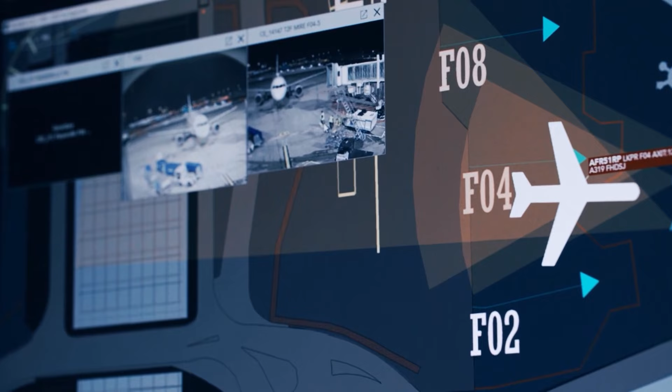They do their utmost to ensure that a scheduled flight actually takes off, despite the countless hazards faced every day. Air transport is at the mercy of many factors: meteorological, geopolitical, geological, technical, IT, and so forth. So it's our job to steer our business through this obstacle course.

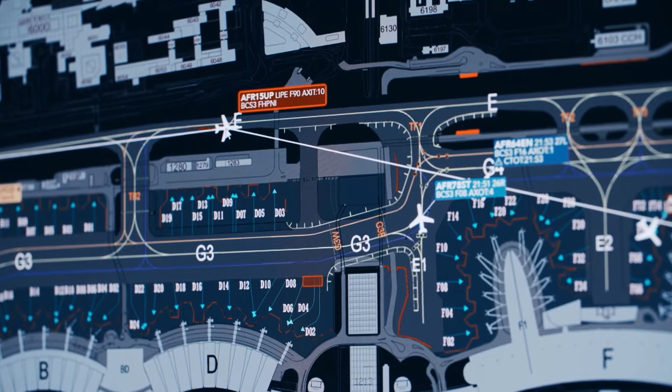To achieve this, the Operations Control Center brings together experts from 17 different professions. More than 150 people are on duty around the clock. Airport liaison coordinators, meteorologists, regulator experts, passenger information specialists. They need to be able to adapt to any situation.

Decisions have to be made on the spot. As you can imagine, depending on unforeseen events such as the weather, things have to be decided quickly. Do we divert a plane? Do we interrupt operations? So it's really about day-to-day situations and being able to validate a decision made in real time. A plane is delayed in New York because of a heavy thunderstorm and is 2 hours late. Obviously, this has an impact on the following flights in the schedule.

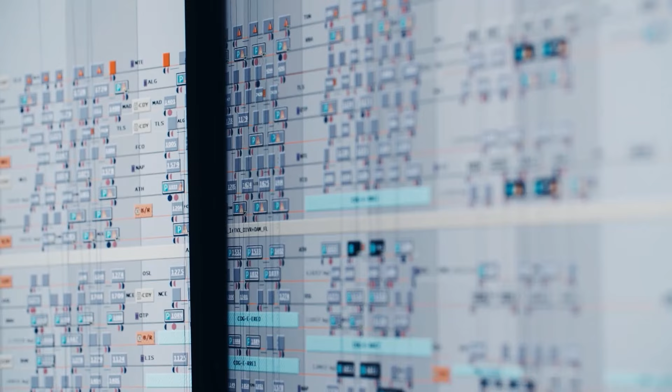Issues pertaining to fleet maintenance and upkeep are obviously at the heart of the control center's decisions. Today, an Airbus A220 bound for Stockholm is causing problems. The aircraft is no longer able to make the trip. The cause? A collision with a bird on its last trip. The Papa November India fire? Is it repaired? No. It won't be ready for the 1462 Stockholm flight.

The aircraft has to be replaced as quickly as possible. The trouble is, the 5 reserve medium-haul aircraft normally used for last-minute emergencies are no longer available, having already been allocated to other flights over the course of the day. I'll ask for it to be on the runway around 8 p.m. if possible to limit the damage.

The final option lies with the control center maintenance specialist. He has to assess activity in the hangar to try to save the situation. Hi, Arnold. We have a problem at the OCC on an A220. I saw that Papa November Bravo is in. Do you think we could hurry it through and have the plane in the next 2 hours?

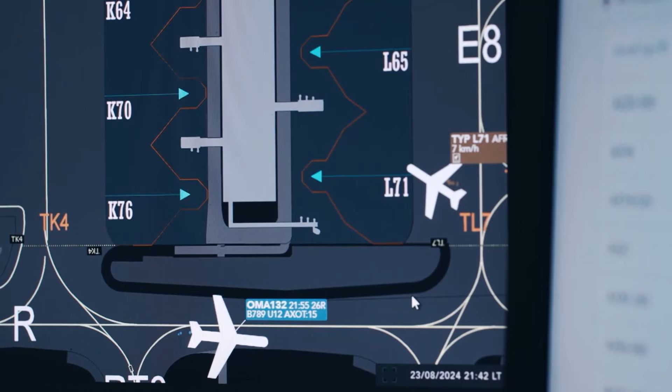Okay. Well, that should do it then.

Maintenance departments adapt their activities and do their utmost to ensure the smooth running of the flight schedule, and thus make any problems invisible to passengers. We are constantly monitoring the state of the fleet, so we can pick the best options to solve any problems that may crop up.

In the Air France hangars, this kind of schedule flexibility is essential. In addition to the usual preventive visits, the teams have to leave room for any unexpected urgent repairs caused by incidents on the ground or in flight, requiring the rapid intervention of technicians, be it a collision with birds or more complex cases.

Back in the H-2 hangar, the A350 Orleans is still receiving attention, and it seems to require a little more work than a simple routine check. The crew and the aircraft's detection systems have reported a probable lightning strike.

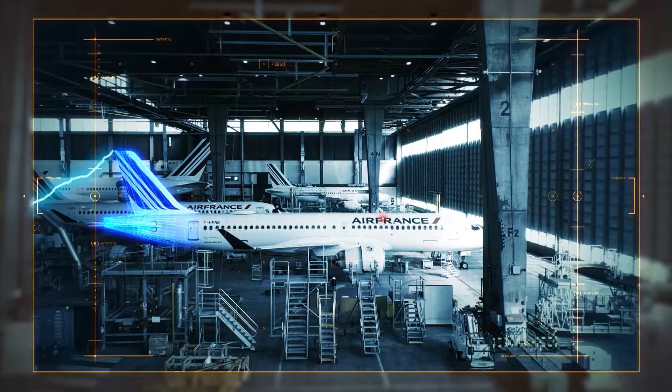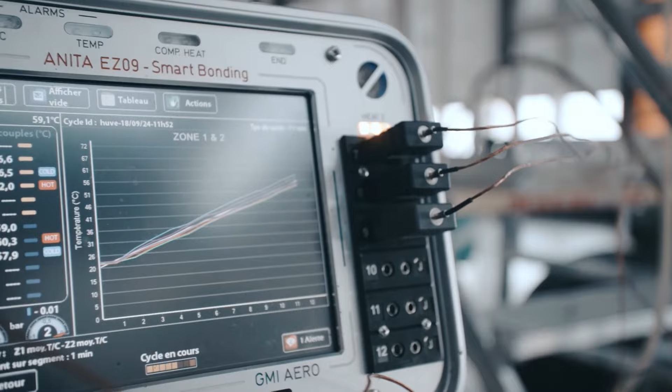Lightning strikes the fuselage just as it would a tree on the ground, except it will be discharged and leave the plane. A problem that can occur, though, is that the impact and the high temperature produce a flaw and an entry point for the lightning on the aircraft. The mechanic's first task, then, is to clearly identify where the lightning struck and what damage was caused.

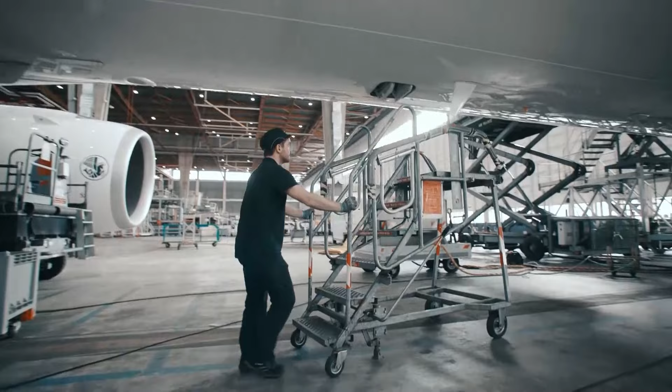When an A350 is struck by lightning, it takes around 100 hours for technicians to inspect the entire aircraft, from nose to tail, examining all the areas that cannot be inspected from the ground. A total of 4 strikes have been identified, 3 at the front on the fuselage itself, and 1 on a fin situated beneath the aircraft.

At first glance, the damage appears minor, but it actually affects a crucial part in the shape of an antenna that ensures communications with the ground. This bundle of electronics is far too sensitive to be kept in its current state and has to be changed immediately. The component is first disconnected from the electronics bay, then removed and replaced.

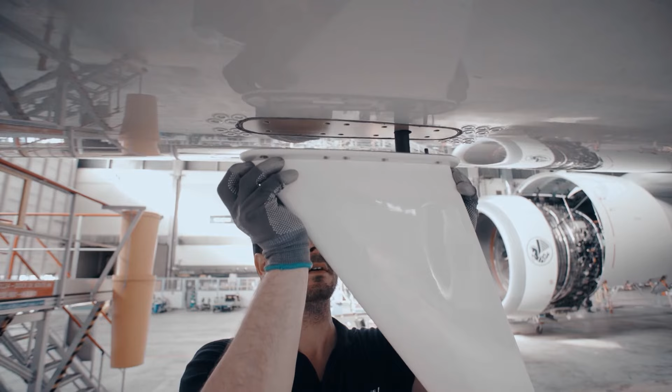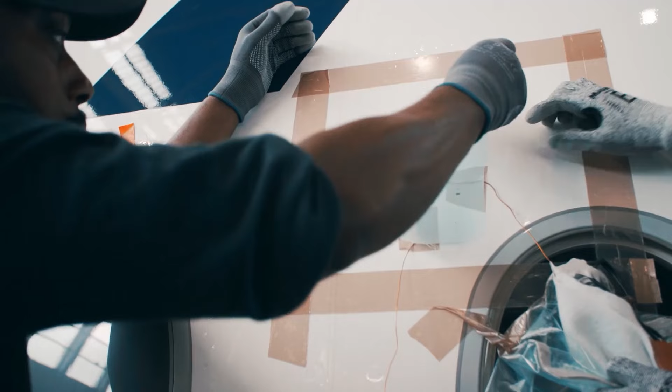While the antenna is being replaced, the other 3 impacts are being dealt with. Straightforward fuselage damage to be repaired before the next flight. Under these strange devices, the areas struck by lightning have been reconstructed and are now being heated by experts of a new kind. Plasturgists have now been brought in as reinforcements to join the usual hangar crew of mechanics. Their area of expertise is the new generation of composites used to manufacture aircraft, which require special attention.

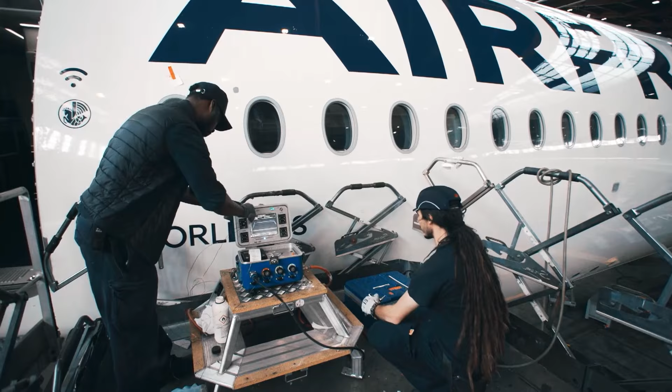We work with carbon fiber aircraft, which are much lighter and stronger than what we had before. The downside is that it's a little more difficult and costly to repair. As a general rule, a repair on a small lightning strike will take anything from 5 hours to 2 or 3 days. It all depends on the depth and width of the impact.

The lightning damage has now been treated on site. After less than 48 hours, the Airbus A350 Orleans will be able to leave on schedule. But that's not always the case. Some repairs require much more extensive work involving operations that are impossible to carry out here at the hangars. In those cases, certain parts of the aircraft need to be dismantled.

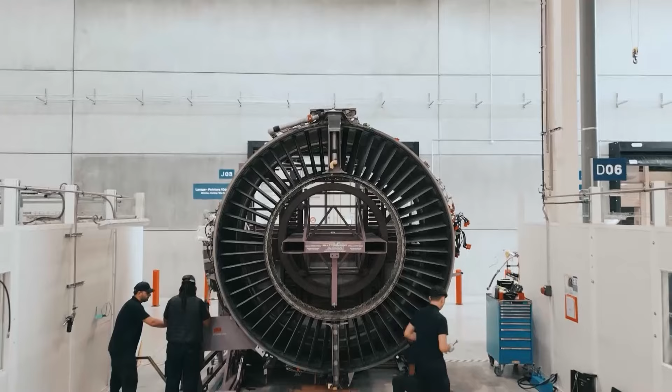To carry out the most complex repairs, Air France has built a large-scale workshop just a few hundred meters from the hangars, the Helios building. Here, away from the hustle and bustle, 200 people are hard at work repairing damage to cabins, wings, or engine housings. These experts can handle traditional metallic components, no matter how imposing, as well as the modern composite materials now used in every nook and cranny of latest generation aircraft.

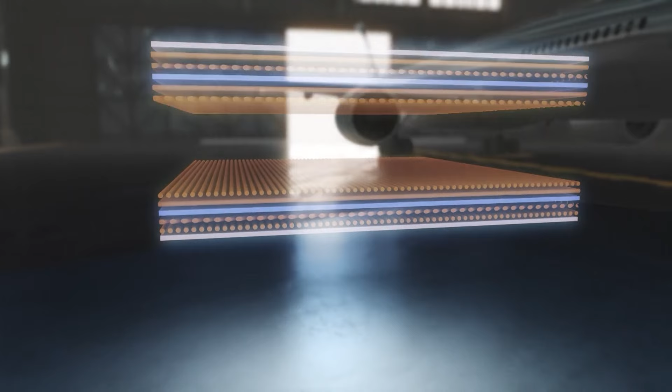A composite is a combination of two substances with different properties, resulting in a material with a performance superior to that of the individual components. Composites, then, are sandwiches of several types of material and, more importantly, several layers. A matrix acts as a support around which can be applied high-strength materials such as glass or carbon fiber using honeycomb cells, which are as light as they are strong. It produces a formulation that is lighter, more rigid, and can easily take on complex shapes.

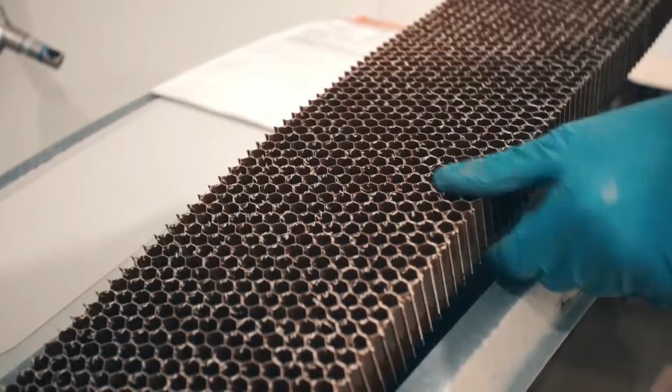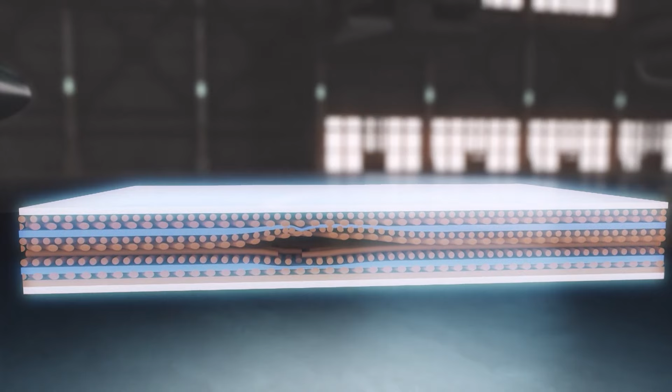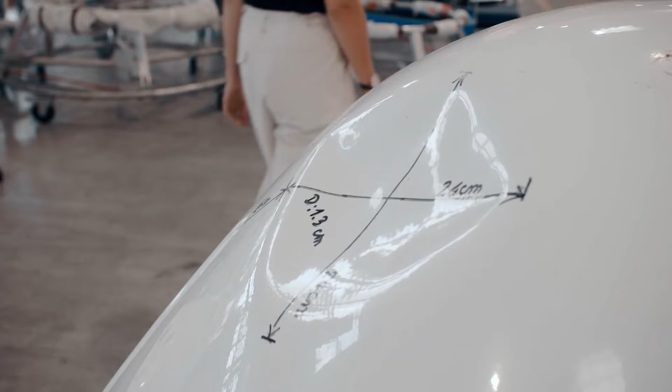It all sounds perfect, except there is a slight drawback when it comes to repairs. And that's the challenge facing the specialists in this workshop. Sometimes, beneath what looks like a minor impact or deformation, the entire structure has actually been affected. In such cases, to carry out repairs, the whole area has to be dug out and rebuilt, layer by layer. Among the elements most often impacted are what are known as radomes, which is actually the nose cone of the aircraft, the section most vulnerable to any impact, however slight. For the specialists in the Helios workshop, repairing this section is a well-drilled activity.

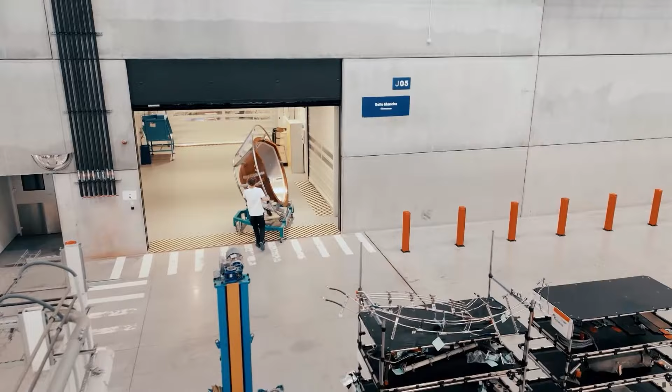The radome can first be placed in what is actually a mold, which helps maintain the part's curvature and preserves its aerodynamic profile. First, we remove the damaged part. Then we take the radome into the clean room to prepare the repair plies and rebuild the area that has been removed. Once the impacted part has been removed, it must be carefully rebuilt to ensure the curves are identical to the original. After a few hours' work, the repair moves on to a key stage, which is curing. This restores cohesion to all the layers of the composite structure.

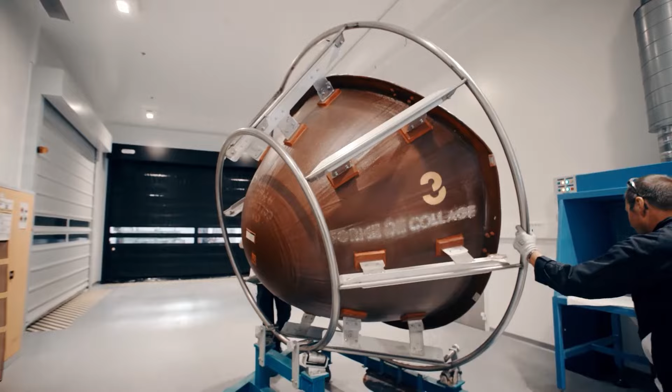The technicians take the part to one of the workshop's major pieces of equipment, the autoclave, which is a high-pressure oven.

All good for you, Thibault? Perfect. Can I pack up?

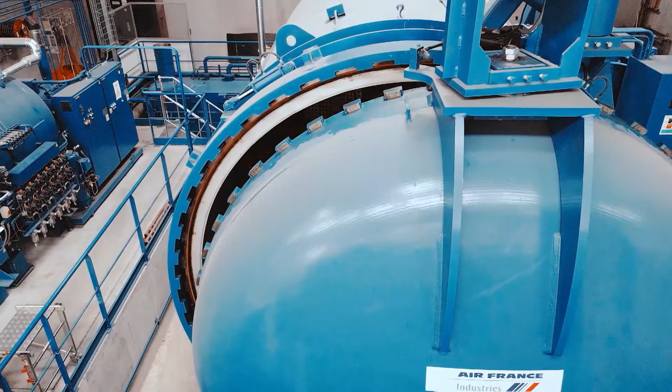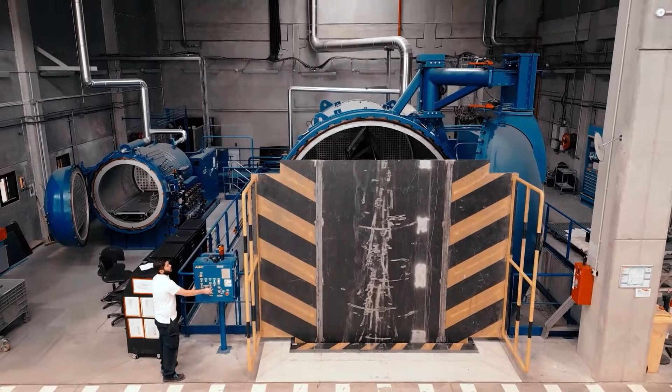Let's go. The autoclave allows high pressure to be built up at high temperatures, making sure the pressure is evenly distributed over the whole part. After 8 hours of rigorously controlled curing, the part emerges as good as new. The repaired areas are now incorporated into the structure, with the composite layers perfectly bonded to each other. After stoving, we check that the repair has been properly heated and the plies properly compacted. And then we're done. The repair is validated. And at that point, the part can be sent for inspection and painting. It can then leave our workshop and be used as required to support the fleet.

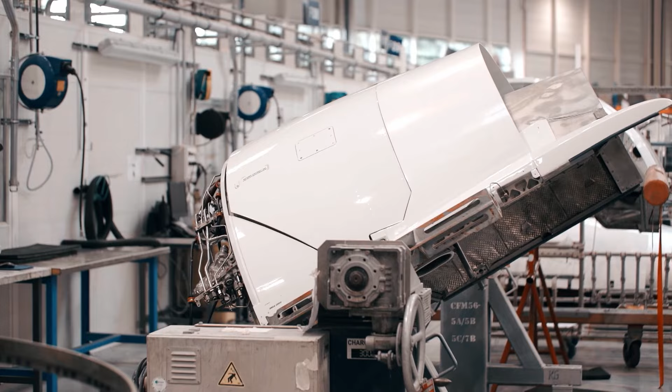In the event of damage, the hangar mechanics will be able to retrieve this freshly repaired radome from the spare parts warehouse, while dropping off the damaged part to be dispatched for repair. At Helios, at any given time, over 500 different components are in the workshop for repair, a process undertaken with calmness and expertise. These repair crews are essential to the day-to-day maintenance of aircraft, even more so when aircraft needs a more thorough checkup. Aircraft are then sent to the other side of Paris to hangar HN3 at Orly, a building specializing in operations that fall under the major servicing banner.

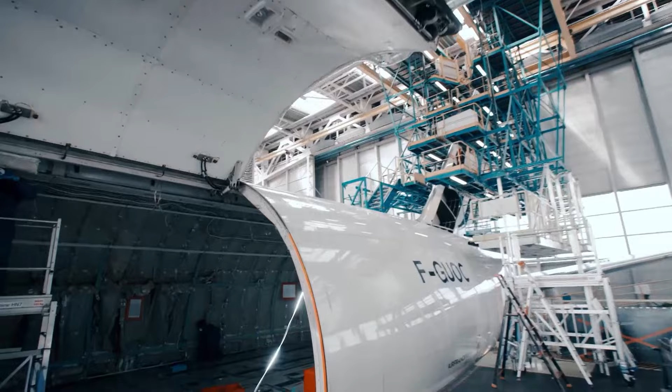In addition to the regular inspections, which mobilize the aircraft for no more than a few days, every aircraft also has to undergo a series of more extensive and thorough checks. This is when an aircraft is brought into a hangar for several weeks so it can be thoroughly stripped down. We remove the side panels, floors, and cargo compartments. This gives us access to all the elements not visible during normal operations of the aircraft and allows us to check for corrosion on the fuselage structure and other elements, as well as cracks and elements that may be in need of repair. These major stripping down visits are key milestones in the life of an aircraft.

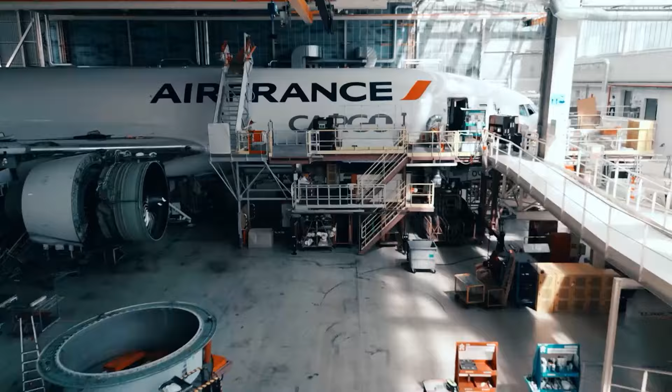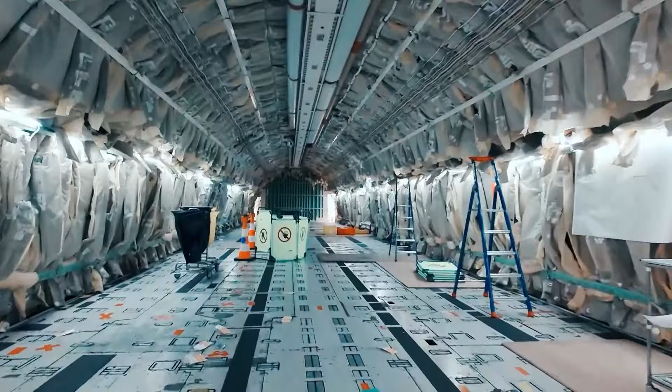16 years after entering service, the Boeing 777F is undergoing its fourth major service. That's one every 4 years for an aircraft with a very specific role. This is one of the company's 2 cargo aircraft, a Boeing 777 specially adapted for transporting goods. A cargo aircraft has no passenger seats and is dedicated solely to transporting goods. Each plane can carry 100 tons of cargo. On cargo planes, the interior of the windowless cabin is transformed into a huge hold, suitable for loading pallets.

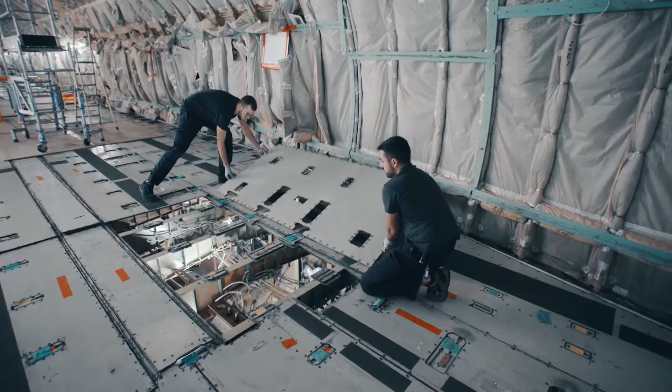One of the major stages in the overhaul is thus a detailed inspection of the aircraft's loading deck, and in particular the attachment points on the huge reinforcement rails. These fasteners are very important. If the cargo wasn't secured properly because a fastener was loose, it would jeopardize the safety of the aircraft. See this?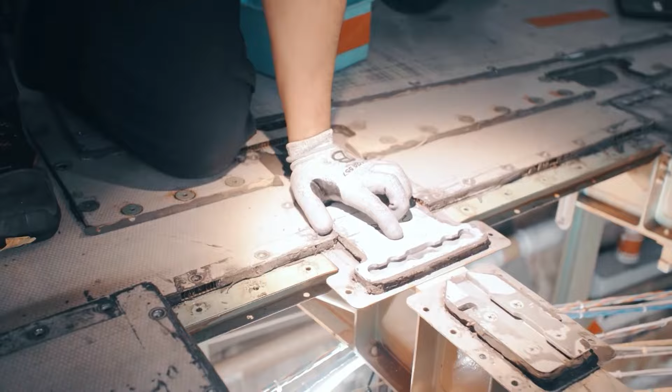It's deep. Corrosion. Sector by sector, meter by meter, the teams check the hundreds of attachment points and report any sign of a defect, corrosion, weaknesses, and cracks that could compromise load safety. First fitting, a tooth is missing here. Small impact on the rail. We'll write it down. I'll make a note of it.

Once their inspection is done, the repair technicians can step in. This painstaking work is just one aspect of a major service. While the cabin is being inspected, beneath the 777's huge left wing, a team prepares to examine a particularly sensitive area, the fuel tanks.

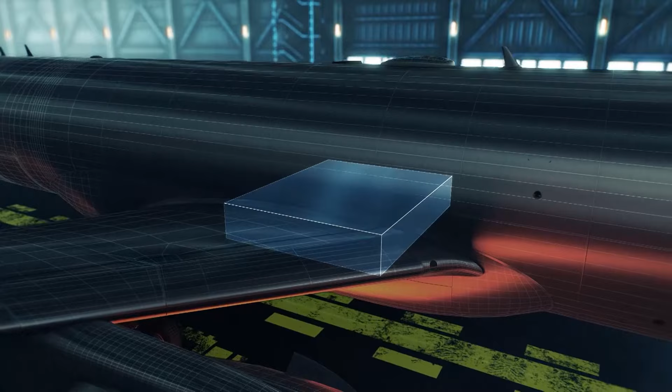On the 777, as on many modern aircraft, fuel is stored partly beneath the cabin in the central tank, but mainly inside the giant wings. A total capacity of 180,000 liters is spread over the entire wingspan of the aircraft. This volume is compartmentalized to prevent any large-scale shifts of fuel that could destabilize the aircraft. It is a complex and highly sensitive area that needs to be 100% safe.

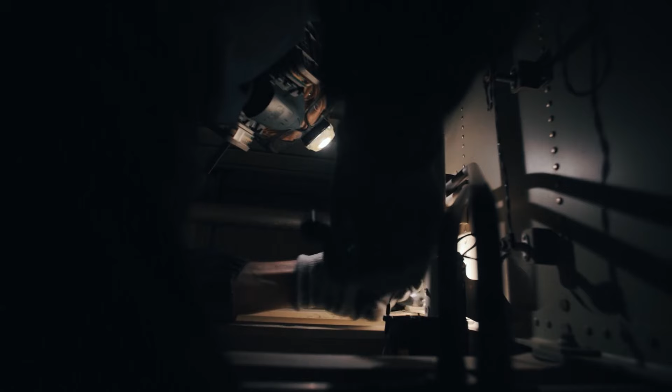Wearing a special suit that eliminates the risk of even the slightest spark, the inspection technician slides into one of the openings. He checks for wear and tear, corrosion, and ensures the high-tech equipment built into the tanks is in good working order. It isn't just an empty container. Inside we have detectors to indicate the fuel level. We have a series of pipes to allow fuel to be transferred from one tank to another, so that the left engine can be supplied from the right wing and the right engine from the left.

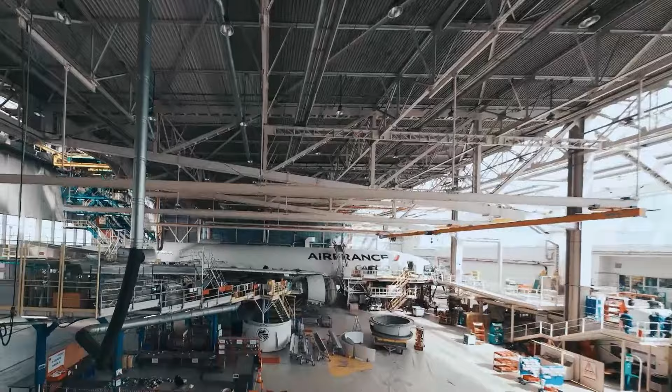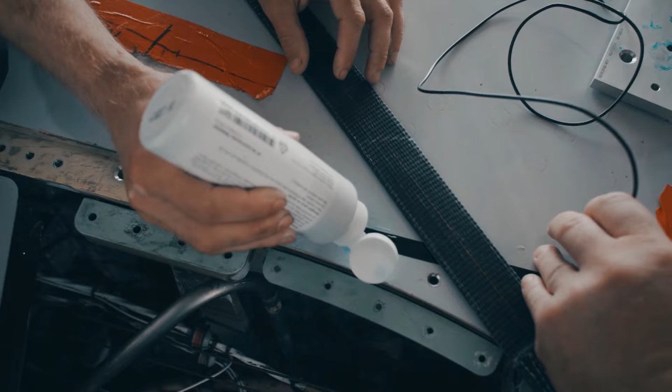Moving through the compartments, one by one, the team looks for the slightest anomaly. It will take them a full day to examine just one of the 2 wings. During these major services, every nook and cranny of the aircraft is scrutinized. Across on the other side of the aircraft, perched on the right, specialized technicians are engaged in a particularly meticulous assignment. Again, with extreme precision, they are closely examining the aircraft's structure, right down to the thickness of the materials. Their objective is to detect any signs of structural fatigue. Micro cracks and fissures can appear over time and need to be identified as soon as possible.

The aircraft is subjected to a great deal of stress, whether taxiing on the ground or in flight, and as a result, can often suffer deformations. The fuselage is subjected to pressurization and depressurization cycles, in addition to temperature variations ranging from 20 degrees on the ground to minus 56 degrees in flight. So all these conditions can generate stress in the structure and lead to fissures or microcracks at corners, around rivets, or at the seams. Let's look for cracks.

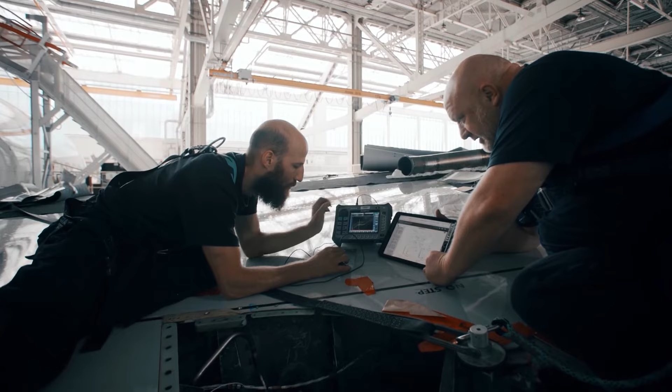It's important to detect every micro crack as early as possible because what we can't control is whether it will develop into something larger and ultimately lead to an unwanted flaw. Like a crack in a windshield, it will just keep growing until the structure ruptures. Now I'm starting to see the defect.

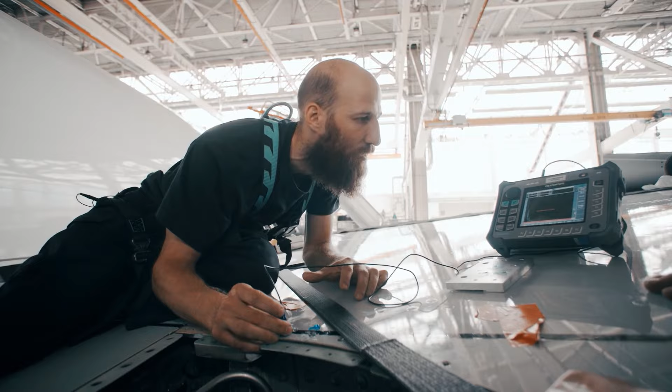The specialists in these structural tests scour the most critical areas of the fuselage and wing with a fine-tooth comb, centimeter by centimeter. By sending an electric current through the material, they can detect the slightest defect or irregularity and potentially the beginnings of a crack less than a millimeter in size. Now we've got the flaw. The crack is there. We were well adjusted. Perfect. Again, if a defect is found, it will be up to the repair teams to intervene as quickly as possible.

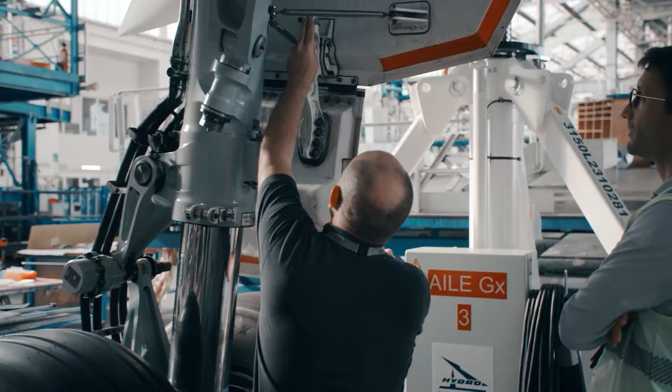These major inspections are painstaking, complex tasks that take several weeks, a period during which nothing is left to chance. The organization never changes. It's important because it means we don't have to come back to the same task 10 times to make sure we've got it right. In all, to go around a wide-body aircraft like the 777 cargo plane will take 10,000 man-hours, just for the inspection. Then another 8,000 hours for repairs.

Repairs on the aircraft itself, beneath the wing, often require the delivery of replacement parts. But some parts require their very own overhaul, a refit from A to Z in specialized workshops. The powerful engines are without question the key component of any airliner. The centerpiece that can lift hundreds of passengers off the ground and propel them safely through the clouds. Back at Charles de Gaulle Airport, the Helios building is where Air France's extensive engine overhaul and repair program begins.

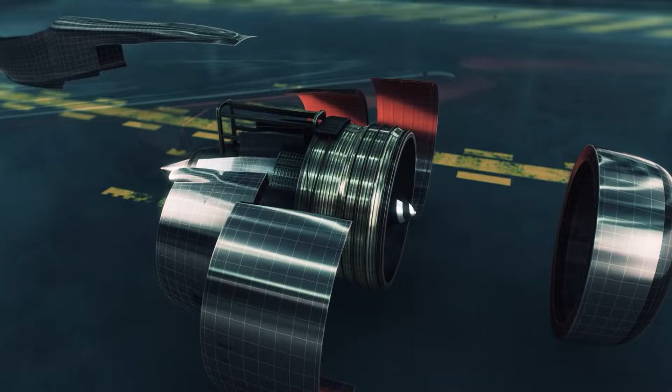First, the entire housing is removed. This includes all the parts covering the engine, and in the case of the very largest, like those of the Boeing 777, the gigantic front cowling that protects the fins. This 2-ton piece of metal needs to be carefully maintained. Guided by the Helios experts, the casing is carefully moved, positioned horizontally, and then inspected in detail.

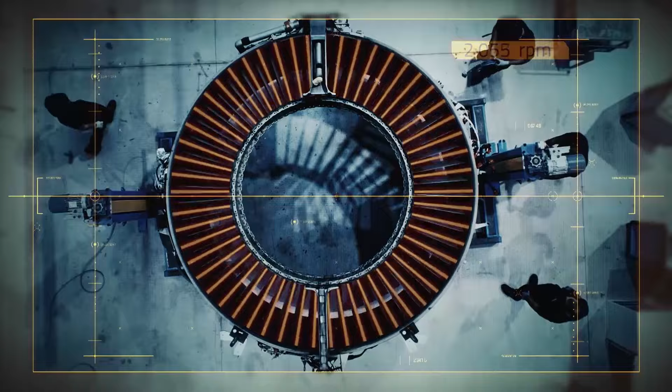Here in this chamber, the jet engine's blades are made to rotate at full speed, over 2,000 revolutions per minute. The technicians not only check the housing for corrosion, they also closely inspect the condition of the inner lining. When the engine is started up, the blades brush against the inner face of the housing, leaving only a tiny gap for the tiniest possible layer of air. The surface of the coating needs to be flawless and perfectly smooth.

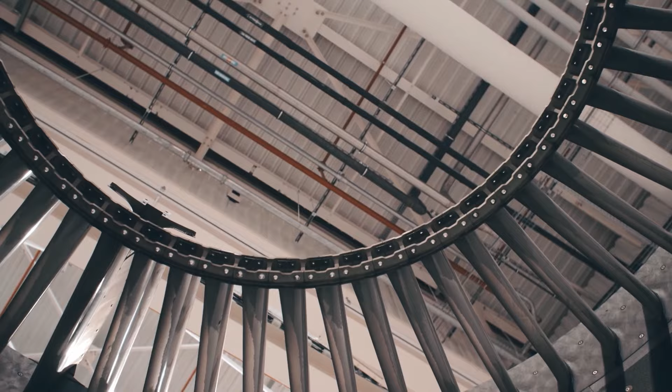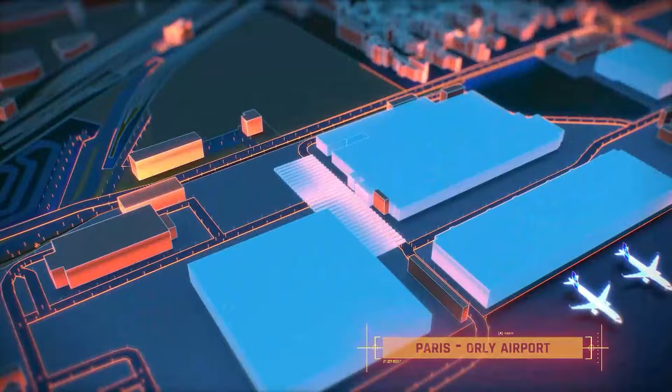As with the wings and fuselage, this is again very precise structural work, essential for the safety of the entire aircraft. With the engine housing removed, it is now time to dive into the aircraft's inner workings. Back to Orly, the engines are settling in for a lengthy stay of some 2 to 3 months in a complex where the entire overhaul chain is housed under one roof.

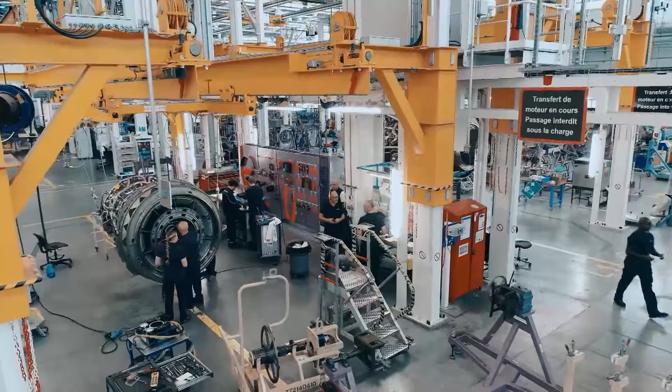From all the Air France hangars, as well as those belonging to other airlines, some 250 engines a year are sent here to be overhauled. Inside this first 10,000 square meter building, dozens of workstations are dedicated to a particular type of engine. Here, experts specializing in a specific model are able to examine it from every angle, whatever the reason for it being there. Are we good on your side with the seal?

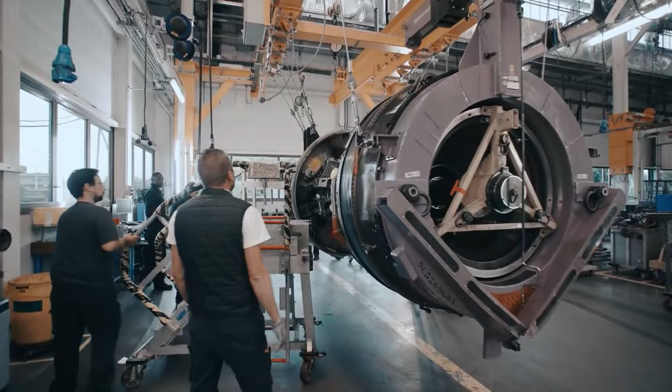Engines end up in our workshops for 2 main reasons. The first is preventative maintenance. That's a bit like having the engine or bodywork overhauled in your car. So after a given number of hours in the air, you need to dismantle the engine to inspect certain parts. Then there's curative maintenance, triggered either by poor performance or maybe after a bird strike. Then we occasionally have to deal with breakdowns, cases where we need to investigate the engine and identify the parts that no longer work.

Whether it's a one-off breakdown or a standard overhaul, the first step is, of course, a detailed inspection. A thorough examination of the mechanics using a device called a borescope. This miniature wired camera penetrates the deepest part of the engine, like a surgeon's endoscope camera. The operator examines all the workings of the mechanics, having access to a detailed view of each part and identifies any potential defect. It's a first-hand glimpse into these mechanical monsters.

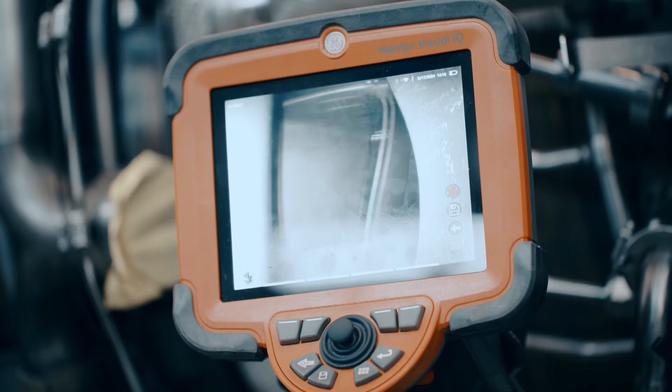The engine is the aircraft's most complex component. It not only provides the thrust that keeps the plane in the air, it also acts as a small power plant, generating the onboard electricity. It is partly responsible for generating the airflow in the cabin, as well as driving the hydraulic power for the flight controls.

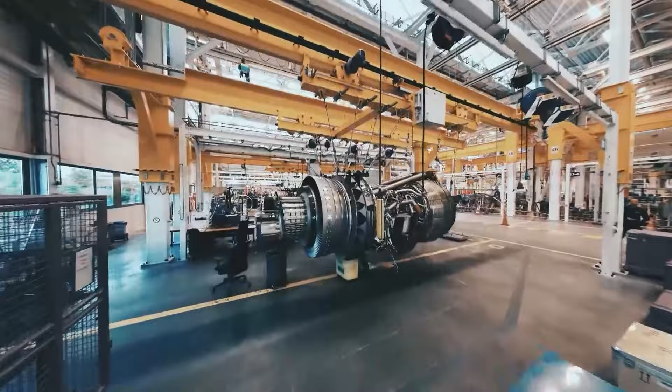Once the inspections have been completed, the serious business can begin, and the engine is placed on a disassembly bench. Suspended above the ground, attached to a sturdy overhead crane, first the large modules that make up the motor need to be prized apart. It's a delicate operation that calls for extreme care. Everyone in position? Yeah. The low-pressure turbine with its 2.8-meter shaft is removed. Should I pull slowly? Yes.

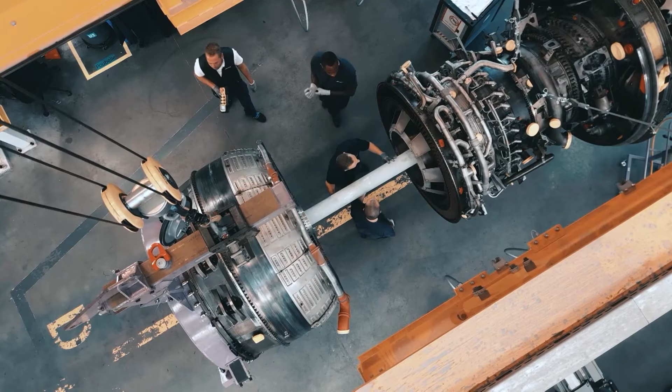All right, it's coming. We remove the turbine, which includes the transmission shaft that runs through the entire motor. This is the shaft that drives the fan blades, which are the fins you see when you climb aboard an aircraft. It's a huge operation in terms of cost, because if we damage the shaft, the part is worth something like €1 million.

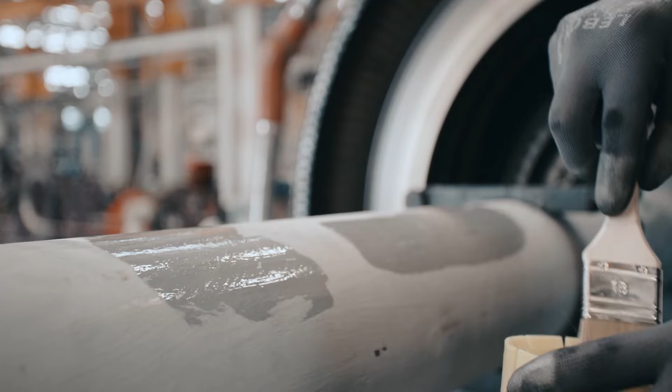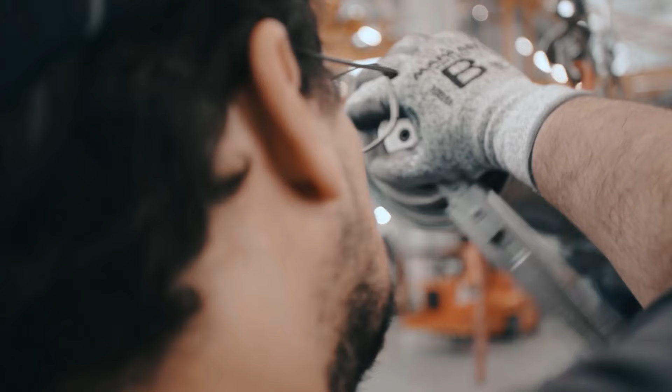On top of that, we have what's called breakage damage, meaning we're probably going to have to inspect other parts and dismantle other modules because we've damaged the shaft. So the overall dismantling costs run into several million more euros. A little more weight, please. There, that's better. The technicians are very experienced and need to pass theoretical and practical exams before tackling these jobs.

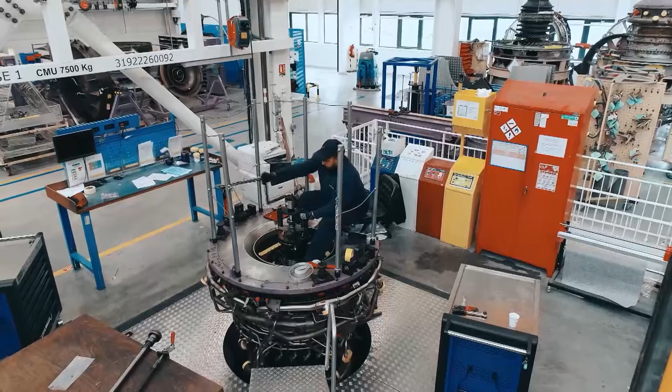Once the various modules have been separated, the actual revision work can begin. The technicians dismantle the entire engine piece by piece. Thousands of elements, from smallest to largest, all as delicate as they are important. In the next building, the workshops dedicated to this meticulous examination receive the engines piece by piece. Every bolt is cleaned, tested, and cataloged.

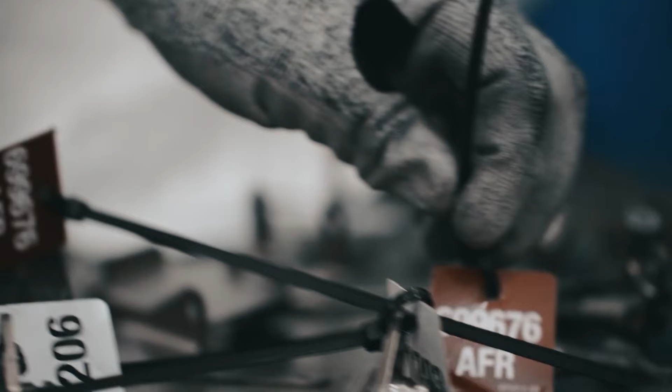A few dozen meters away, gears are checked, assessed, and tracked. This extreme vigilance for every component of every engine, no matter how small, is crucial to flight safety. We're dealing with very small parts that are subjected to extremes, both in terms of physical abrasion and temperature. Very small parts like these will potentially need to have tiny holes for cooling, while at the same time being subjected to forces of pressure.

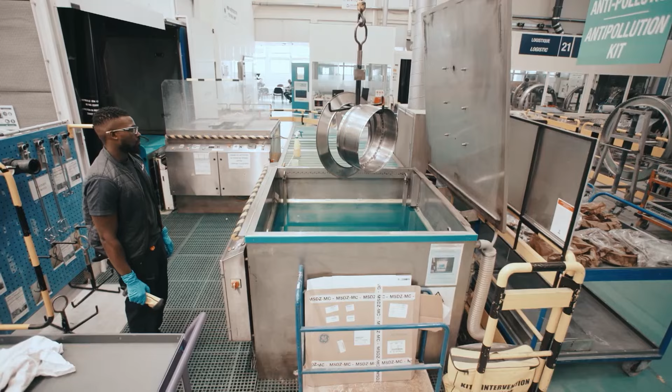Right at the end of this huge inspection chain, the experts in crack detection intervene once more. And again, they're on the lookout for the slightest defect that could potentially grow and degenerate. Their technique of choice is dye penetrant inspection. The most sensitive parts are immersed in baths of fluorescent agents. This is followed by a series of washing, soaking, and heating operations to fix the dye into any slight irregularities present in the component.

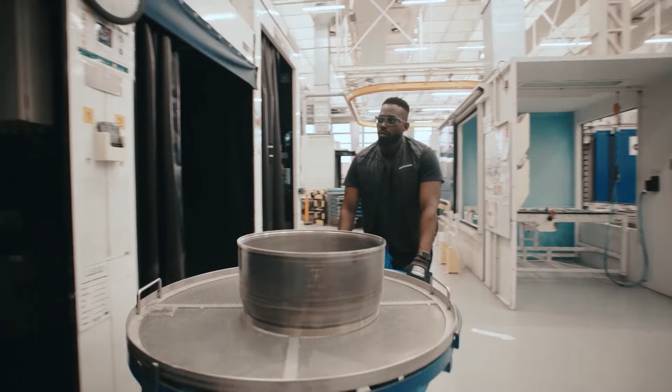Finally, in the dark room, under ultraviolet light, the magic happens. The tiniest flaws are revealed. If there is the slightest doubt, the part is removed and replaced. Once we have the status of all our parts, so we know which ones have been repaired, which ones have been replaced, and which have been overhauled, then we have a whole preparation phase that involves recovering all the parts we need to reassemble our modules, and ultimately our engines.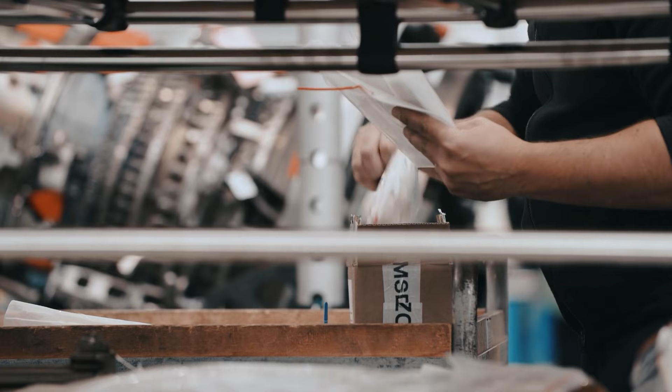After 4,000 hours of inspection, examination, and maintenance, a further 2,000 hours are needed to ensure flawless restoration of the engine. A piece of technology with thousands of meticulously reassembled components. Along the way, every operation is checked and rechecked. When the workshop's job is done, the safety of the world's aviation industry is at stake. Every minute, all around the world, 70 takeoffs depend on the reliability of these incredibly complex engines. Yet despite the rigorous procedures and unstinting attention of the technicians, there is no such thing as zero risk.

A general overhaul of the engine affects a lot of things, not only everything going on inside the engine, but also many of the parts that are reassembled outside the engine, such as pipes, bolts, and nuts, as well as the flow of hydraulic fluid or fuel. But in the workshop, we're not able to test the impact of all those operations to ensure there are no defects. The engines are put to the test throughout their life at extreme temperatures with dizzying rotation speeds. Complete confidence and flawless reassembly is one thing, but paper certification isn't enough. So once out of the workshop, they need to be tested under conditions as close as possible to the real thing.

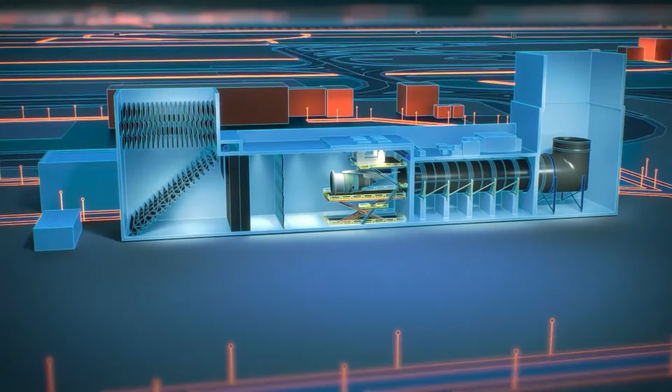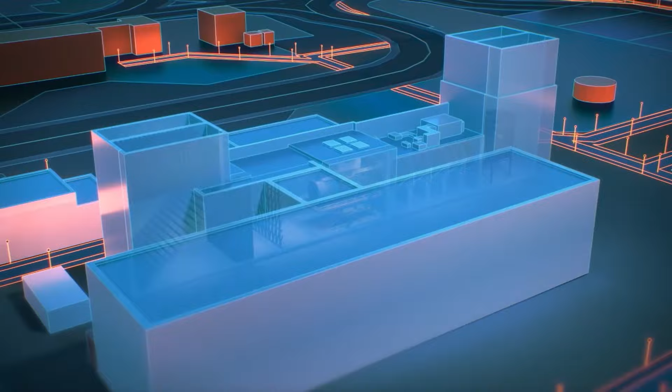It's time for one last trip to Charles de Gaulle Airport. This time to the Zephyr building, home of the great engine testbed. This building, the only one of its kind in France, is tailor-made to test, monitor, and analyze the behavior of engines running at full throttle. Alongside the preparation workshop, its main asset is the test cell, which runs the entire length of the building. At the center is the area where the engines are set up, and it is here that they will be pushed to their limits. On either side, huge ventilation shafts ensure a high rate of airflow while preventing the entry of any foreign bodies. Finally, the entire structure of the building is designed to resist the strongest thrusts and limit vibrations.

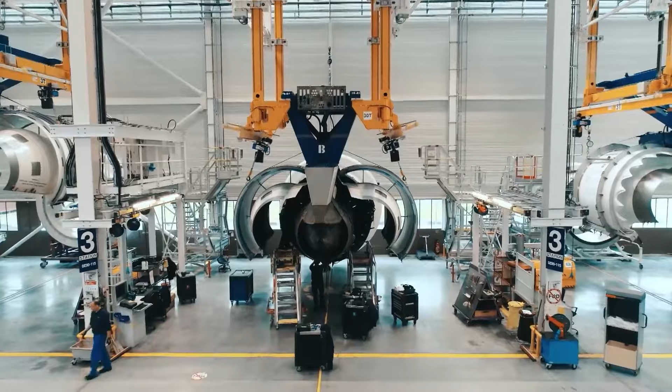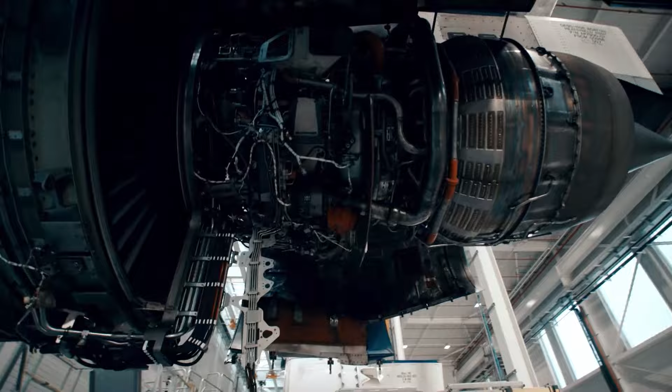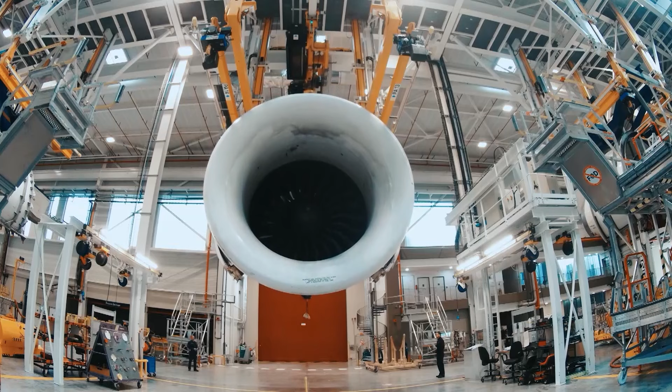Operations begin in the workshop beside the test area. The first 8 hours are devoted to preparing the jet engine. An hour before the test begins, it is ready to be directed to the test unit. Along a rail perched some 10 meters above the ground, the engine is guided slowly but surely into position. It's a meticulous operation because an engine weighs several tons, and transporting an engine is no simple matter. So it takes around 45 minutes to cover what is really a rather short distance, no more than about 50 meters. We do it at low speeds to make sure we don't damage anything.

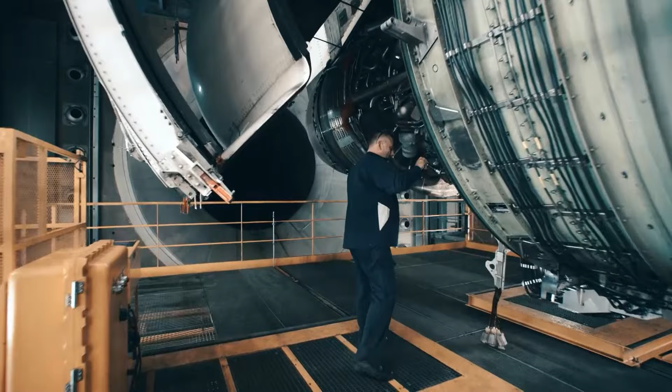The jet engine is slowly moved along through gigantic doors to the test cell. At the end of its journey, it is secured in its final position, ready for testing. A device monitors its every movement, while providing power to accurately simulate the in-flight conditions beneath the wing. The engine will be hooked up to what's known as the thrust balance, which will enable us to measure the thrust of each type of engine and also connect the engine to everything it needs to work, i.e. the motor needs electricity, fuel, and air.

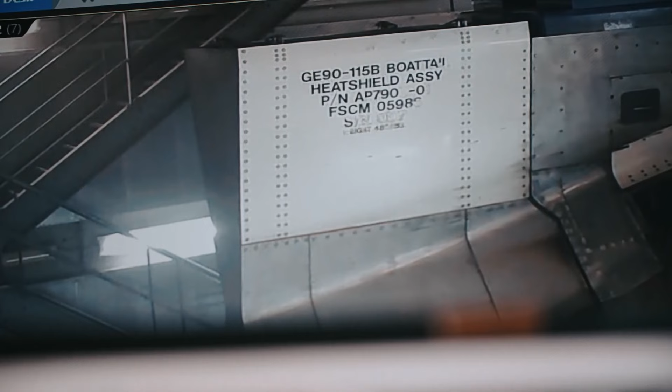Once all the connections have been completed, the cell is evacuated and the operators take their places in the control room. This is like a cockpit where all the engine's parameters can be accessed and monitored visually from every angle thanks to 7 adjustable cameras. The test can begin. We have a testing mechanic who initiates all the operations on the engine. He's the one who decides when to accelerate, decelerate, start, and stop. And besides him, we have a test driver to oversee the whole setup.

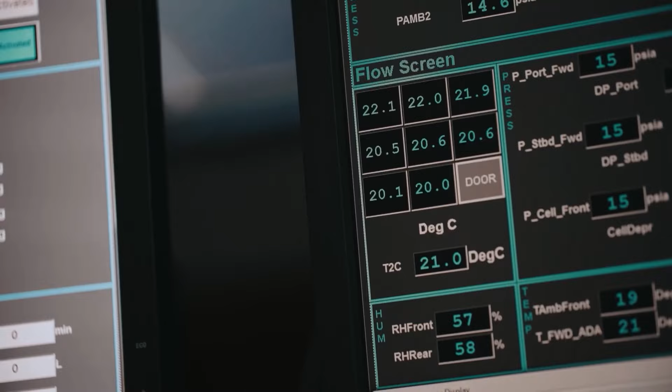For the next 8 hours, the testers will put the engine through its paces, building things up very gradually. After an initial run without fuel, to check for any leaks, the testers launch the running-in period, when the engine is started up at reduced speed to give the various parts time to settle. Finally, thrust, vibration, and balance are tested.

Everything is scrupulously reviewed. You can't have any doubts when you put an engine back into service. It isn't enough to say that the engine can provide a little under 115,000 pounds of thrust. You have to be absolutely sure there are no mechanical problems that might shorten its lifespan or reduce performance once fitted to the aircraft. If all the tests are conclusive, it will take another 8 hours to get the engine ready for transport and finally send it off to its final destination, back to where it came from, beneath the wing of an aircraft.

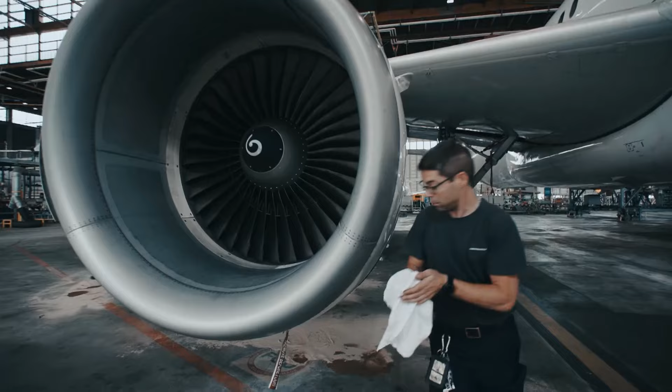Meanwhile, alongside the runways, the activity in the hangars never slackens. Engines are inspected, the ones requiring overhauls are removed, while others freshly repaired and tested are ready to be remounted. A few connections, some final checks, and the aircraft are ready to take to the tarmac. Or almost. Not before a short detour to a special area, the ground test zone. An obligatory check after an engine has undergone even the slightest modification.

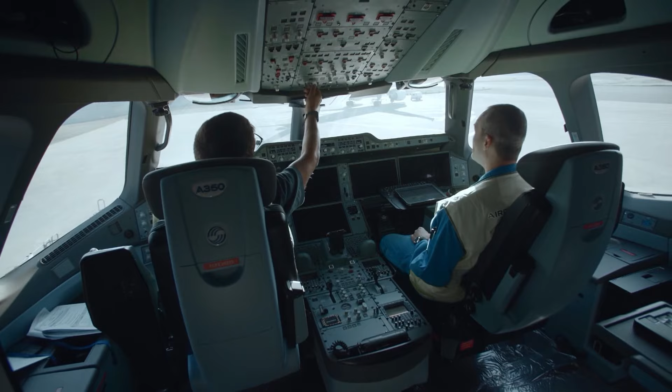Here, 2 specially trained mechanics take the controls for a very special maneuver. The aim is to check that the engines have been correctly installed beneath the wing.

Just a few meters from the runways, in a protected enclosure, the engines are started up while the aircraft remains firmly lashed to the ground. In the cockpit, the mechanics vary the power of the engines and check their behavior. On the ground, they ensure that each component is properly connected. The Airbus A350 Orléans is finally ready to leave the large hangar area and taxi to the terminal for a return to service.

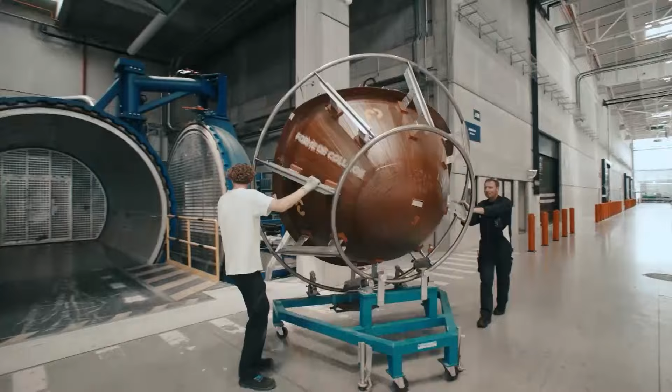Passengers on flight AF334 to Boston are starting to drift into the boarding lounge. The immense maintenance work that has been carried out behind closed doors is drawing to a close. It's a long chain in which every link is indispensable. A huge number of different checks are carried out by different people across a range of sites to ensure we are on top of safety.

Meanwhile, on the tarmac, just a few meters below, technicians continue their mission in the large hangars right up to the last moment. They line up at the edge of the runway to ensure that the flight goes ahead under optimum conditions. No plane leaves without being checked, inspected, and verified by a team of mechanics. 45 minutes before departure, the crew is ready to board. They prepare to take over the aircraft by going around the plane. One last time, one of the two pilots reviews the exterior.